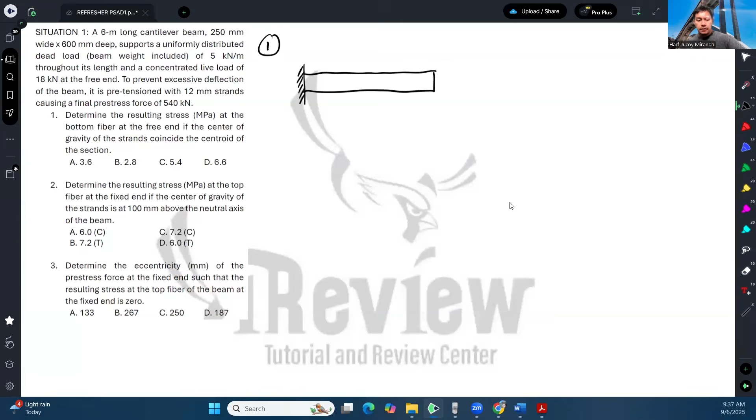So for number 1, we are given a cantilever beam that is 6 meters long, with a uniform load of 5 kilonewtons per meter, and a concentrated load at the free end of 18 kilonewtons. This is a pre-stressed concrete beam.

We are given a dead load and live load, but the analysis here is just elastic, so we will not apply load factors, unless the analysis is USD or ultimate strength design, which would require load factors. Currently in the board exam, all the pre-stressed concrete problems given by Ma'am Praxi are elastic analysis. We would know if strength design is being used if load combinations or reduction factors are mentioned. In our case, none of that was mentioned.

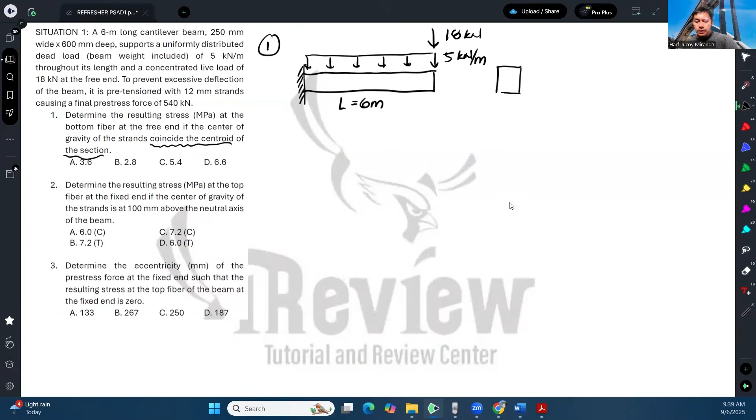So what is the resulting stress at the bottom fiber at the free end? It's important where - the stress at the bottom fiber, at the free end section. We know that these are the tendons, and they will produce a pre-stressing force of 540.

For problem number 1, since it's asking about the free end, the section we consider now is this - let's call it section A. If we look at section A, let me redraw it larger. This is section A, here is the tendon, 250 wide, this is 300, and this is 600.

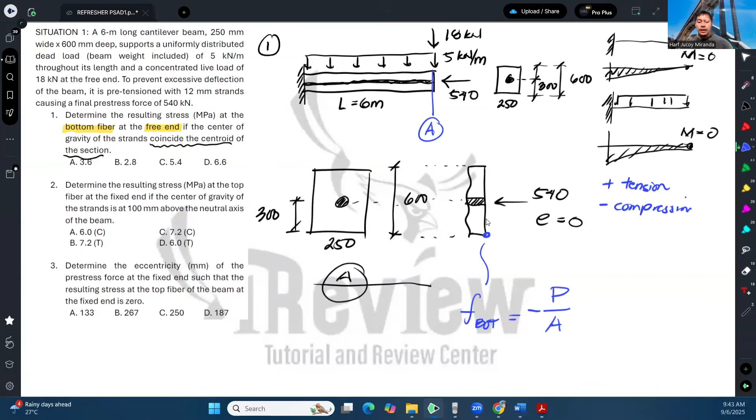Therefore, the stress at the bottom fiber will simply be P over A. Let's make tension positive and compression negative, so the pre-stressing force will produce a compressive stress. So we will have negative 540 kilonewtons over area, where area is 600 by 250. That gives us the stress at the bottom.

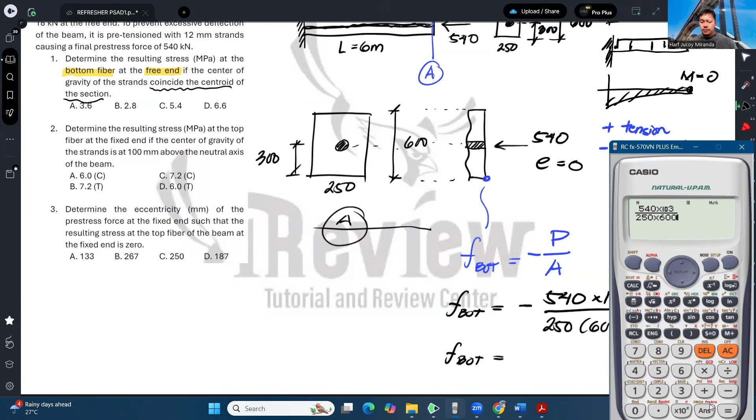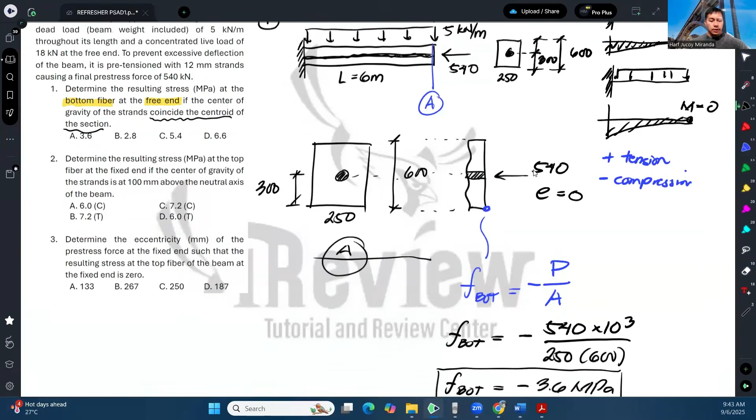So that is 3.6 megapascals, and the negative sign indicates that this is compression. Although wala naman sinabi dito, so 3.6 yung sagot natin. So that is for number 1.

For number 2, determine the resulting stress at the top fiber, at the fixed end. If the center of gravity of the strands is at 100 millimeters above the neutral axis of the beam, nilipat na natin to dito.

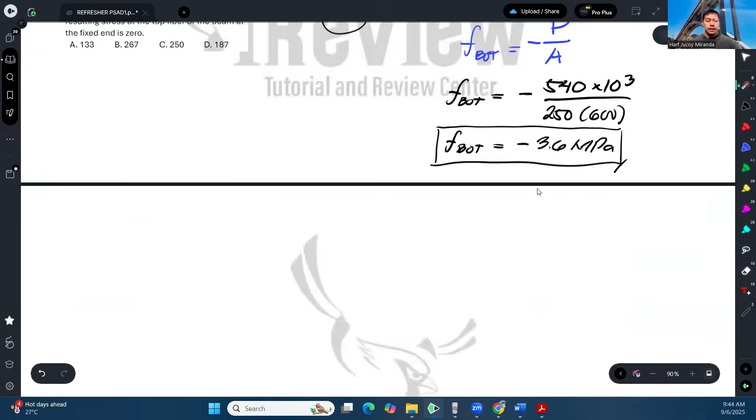So i-drawing ulit natin yon. So ito ulit yung beam natin. Siguro copyhin ko na lang to. Sige, copyhin natin.

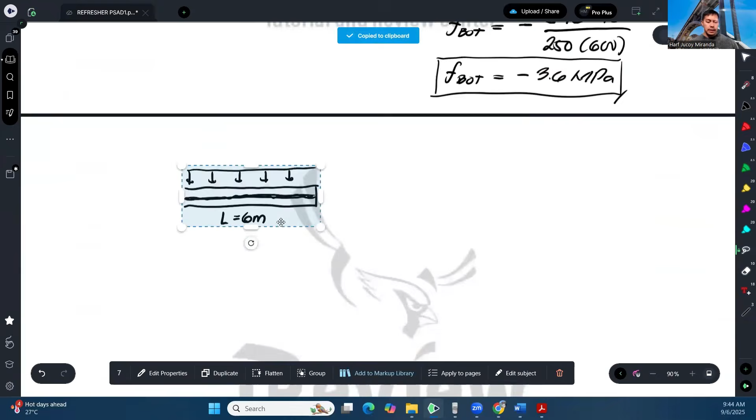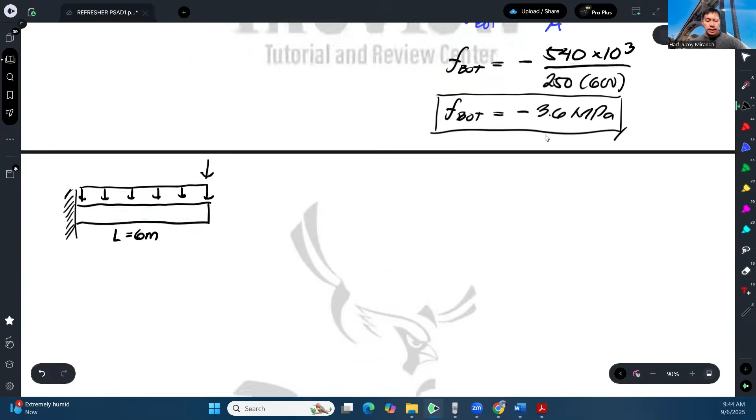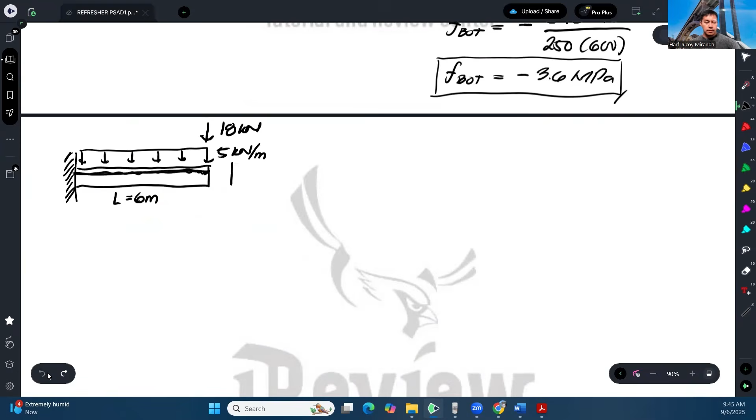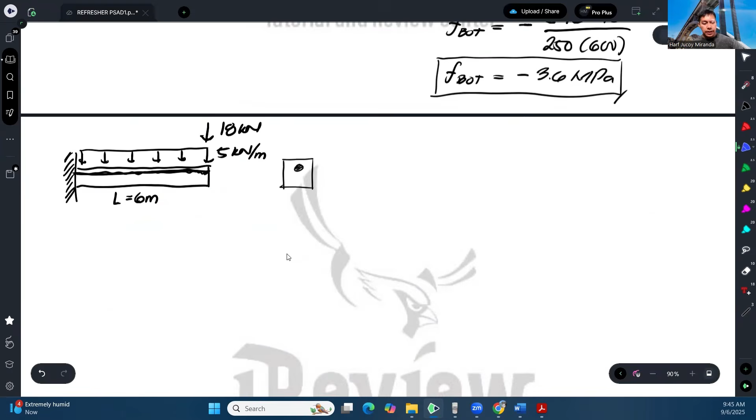Palakihin lang natin. Pero ang ina-analyze natin dito this time is itong section na to. Tawagin natin section B. So, drawing ulit natin section B. Ang section B, ganito ang itsura.

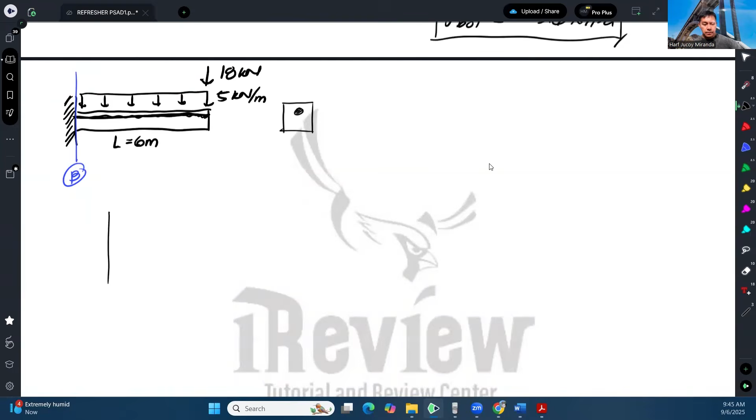Nasaan daw yan? 100 millimeters above the neutral axis. So, 100 ito, 300 ito. Tapos, this is 250. And then, overall depth, of course, 600. So ito yung section B.

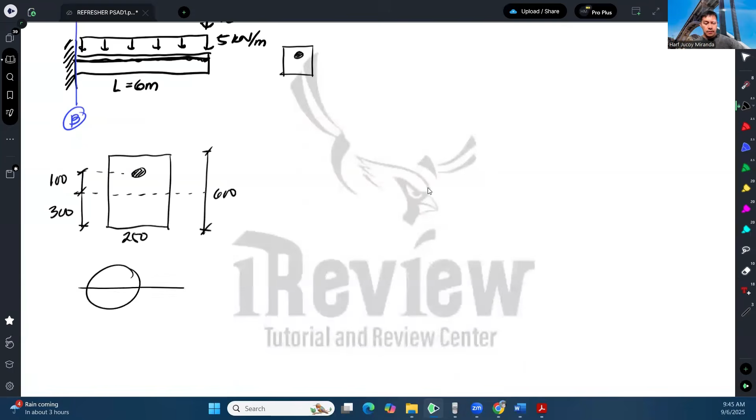Ngayon, pag dinignan natin sa side view yung free end, parang lumalabas, ganito yun. Ito yung support. Tapos meron tayo dito beam. Ayan, yun yung beam na. Tapos ito yung tendons natin.

Okay, so ngayon, nandito yung pre-stressing force na 540 kilonewton. So, it's actually above the neutral axis by 100 millimeters. Okay, so paano natin i-analyze yan?

Well, pwede natin i-convert into a force and a couple or a force and a moment. We have done this in the past na kapag meron tayong eccentrically loaded na force, mag-produce yan ng bending moment in this direction. Pero ito, pwede mong ilipat dito.

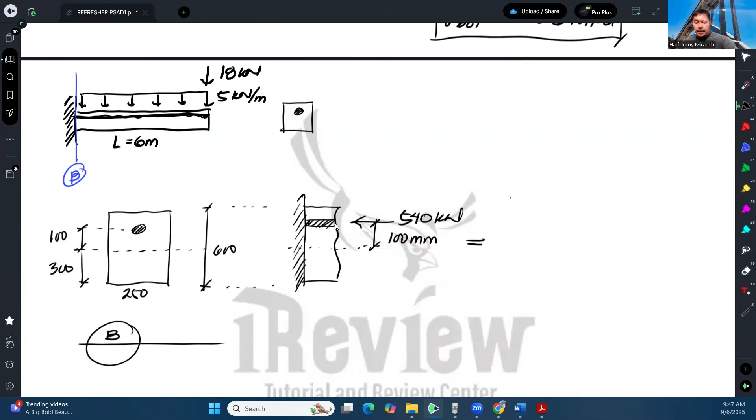Kaya mangyayari, pwede rin yan sabihin na equal lang yan sa nasa gitna yung 540, tapos meron kang bending moment. Now, moment due to pre-stressing force, and yung moment due to pre-stressing force is just P times eccentricity. In our case, that is 540 times 0.1, so that gives us 54 kilonewton meter.

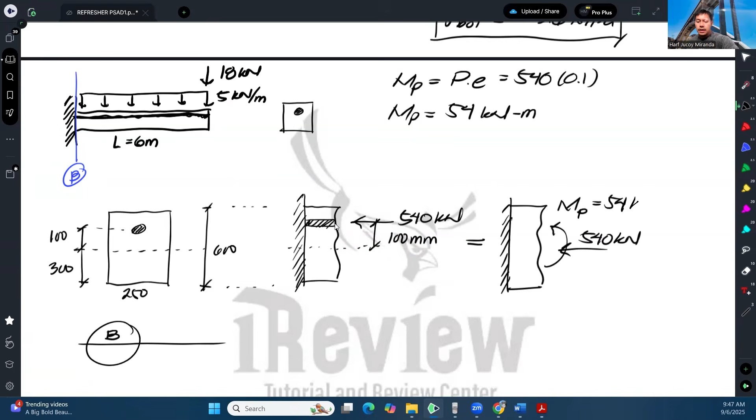Tapos ang tinatanong sa atin na stress ay saan daw? Sa top fiber. So dito tayo maghahanap ng stress, diyan. Ano tayo yung stress dyan?

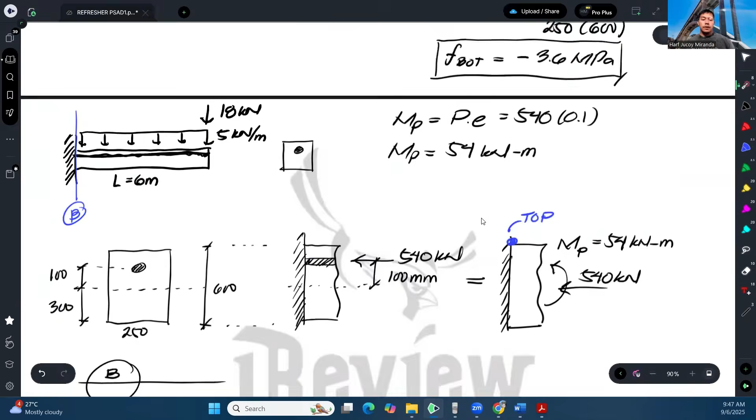So ang tanong ngayon, yan lang din ba yung force or mga forces and moment na nag-act dun sa section B? Now, if you go back, merong mga load. Di ba itong mga load na to will have a reaction here. So this will have, meron tayong reaction dito.

Yung reaction na yun, tawagin natin na M sa B. We can calculate that, no? Yung reaction sa B, so we just take summation of moment at B equal to 0. So we will have yung moment reaction sa B ay equal sa yung uniform load muna, 5 times 6 times moment arm 3.

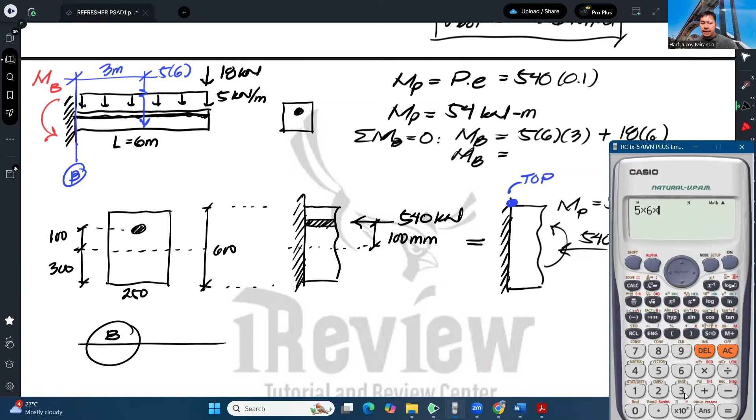Kasi di ba maging ganito to? So 3. Tapos ito, 5 times 6. Okay, and then plus yung 18 times 6. So that will be the moment at B. That is 5 times 6 times 3 plus 18 times 6, and that is 198 kilonewton meter. Okay, so yun yung moment reaction dun sa point na yun.

Alright, so ano itsura niya? Kung dito tayo sa likod, tama itong assumption natin na counterclockwise siya. Ibig sabihin, tama lang, di ba? Pag cantilever, familiar naman tayo dito na ano siya, negative bending siya, na pag ganito yung bending ng beam. Kaya ito, yung reaction ay pag ganyan. Ibig sabihin, yung top yung tension, yung bottom yung compression. Kaya pwede natin siya idagdag dito na pwede mo siya i-drawing sa kabilang side.

Ito yun, yung moment reaction sa MB. Ngayon, pero ang ano ko kasi, ang free body diagram ko kasi I am looking at this fiber na in this side. So, kung babalik tayo natin, yung side na yan, yung moment reaction natin, ito yun. Okay, na 198.

Okay, so ganyan ang itsura ngayon. So meron tayong positive moment galing sa eccentrically loaded pre-stressing force. Kaya natin nilagay yan sa taas para magkaroon ng gantong moment. So parang ang idea, yung gantong bending, kukontrahin niya, gagantuhin niya para makatulong dun sa deflection. Ganun yung idea ng pre-stress eh. So kaya dito meron tayong positive bending galing dun sa pre-stressing force.

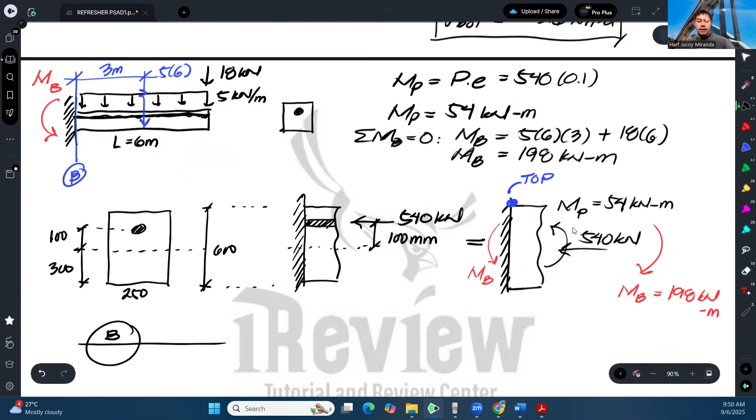So meron tayo nung equivalent axial force, and then galing sa mga loads, meron tayo nitong reaction na 198 kilonewton meter, yung moment reaction doon sa fixed end. Okay, so that means we can now define kung ano yung pre-stressing force, or rather stress, at the top.

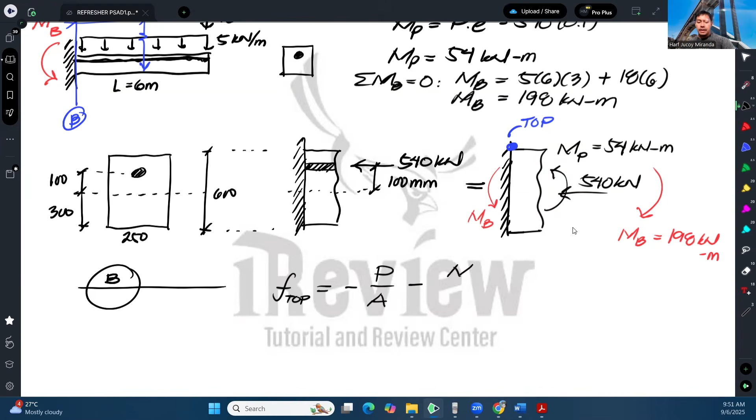So let me start dun sa 540. So compression yan, so negative P over A. Tapos yung moment due to pre-stress, ano rin siya sa top, compression, kaya negative din. So MP times C over I. And then yung MB naman, yung moment galing dun sa mga loads, will produce a negative bending, kaya dito sa ibabaw, tension siya. Kaya ibig sabihin, this should be plus: Moment at B times C over I.

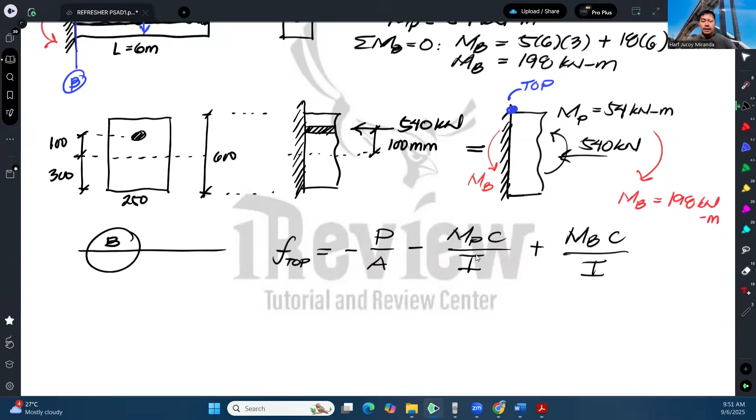So lagyan natin ng values: negative 540 times 10 to the cube over area, that is 250 by 600, minus yung moment due to pre-stress, 54, gawin nating Newton millimeter.

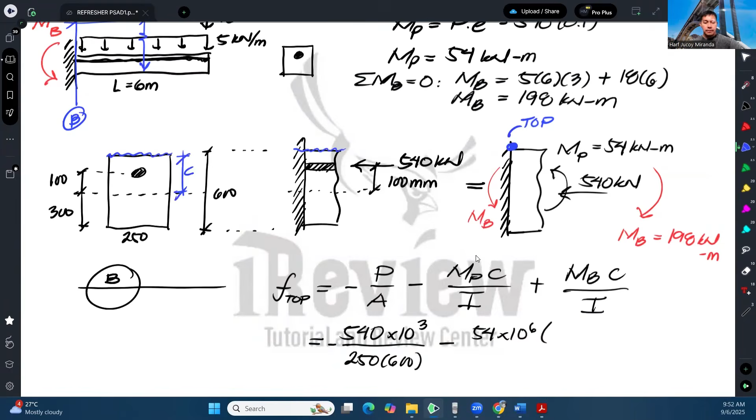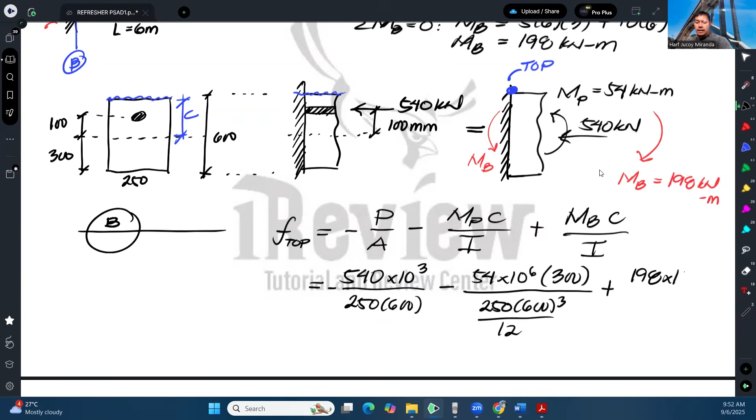Tapos yung C natin, basically ito yung fiber na pinag-uusapan. Yan yung C natin, which is 300, over I, 250 by 600 cube over 12. Okay, and then plus, yung moment naman at B, so 198 million, same lang yung C, over same lang din yung I.

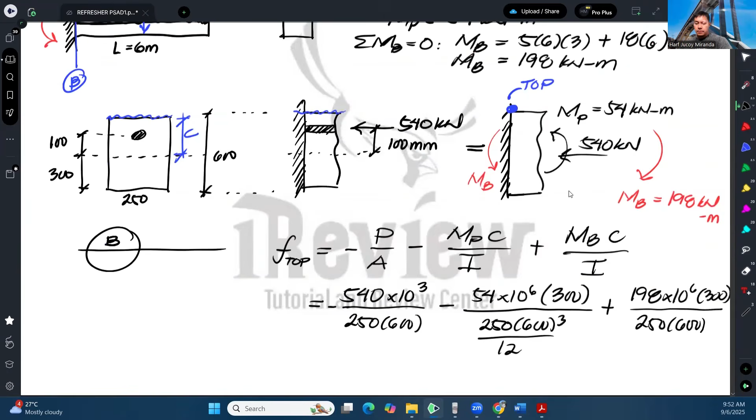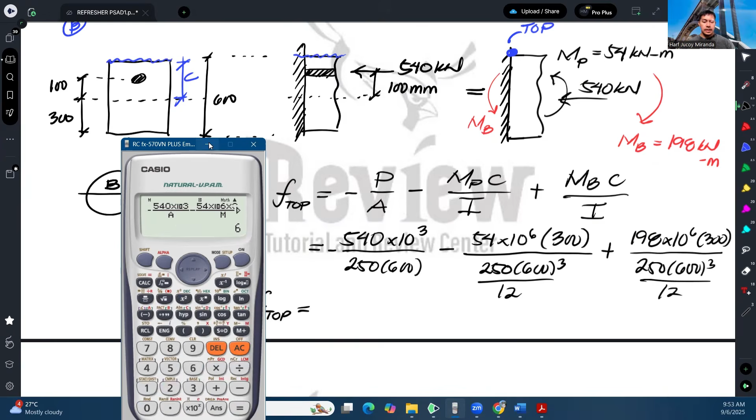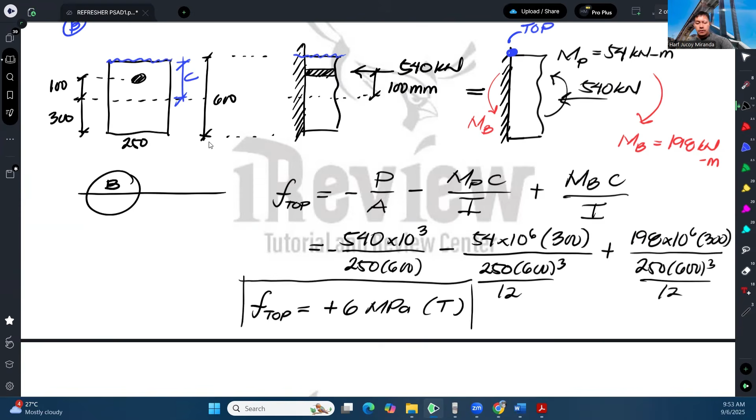Okay, and that will answer the question, ano yung stress sa top at the fixed end. So kumpitin natin. Okay, and that is positive 6 megapascal. So that means this is under tension. So our answer for number 2 is letter D.

Next, determine the eccentricity of the pre-stress force at the fixed end such that the resulting stress at the top fiber, sa fixed end, ay dapat 0 yung stress na tension. Ngayon kasi, so far, meron pa tayong tensile stress. Okay, ibig sabihin itong eccentricity na to, parang kulang, para ma-minimize yung stress doon sa top fiber. Bakit kailangan i-minimize yon? Di ba normally kapag concrete, mahina yan sa tension. So that's why nagpe-pre-stress tayo, para ma-prevent yung excessive na tensile stress na kagaya nito.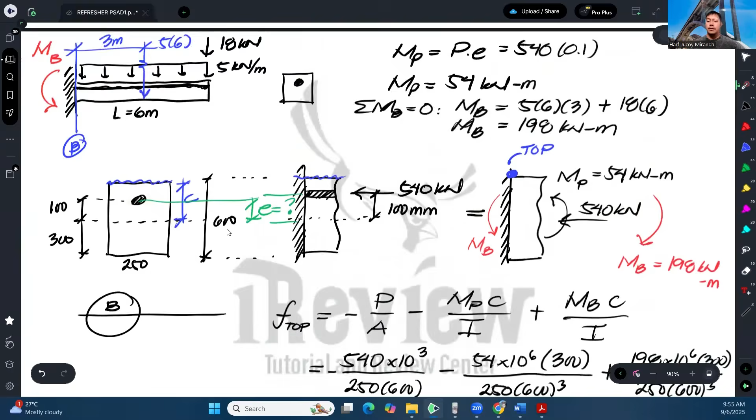Okay, so ito pa rin yung analysis natin. Yun nga lang guys, ang magbabago lang for number 3 ay gagawin natin tong unknown, magiging E lang to. So that means for number 3, we're looking for the eccentricity. Ibig sabihin yung moment from the pre-stress natin will be 540 times E, unknown. And then the rest, the same. Yun lang yung mag-iiba dito. Pero the rest, ito pa rin naman yung moment siya. Wala namang kinalaman yan kung nasaan itong pre-stressing force na to. Ito rin is still 540 over area. So we will just repeat this.

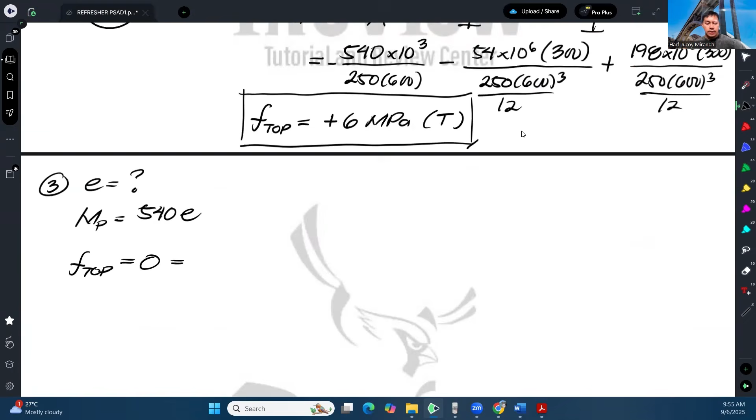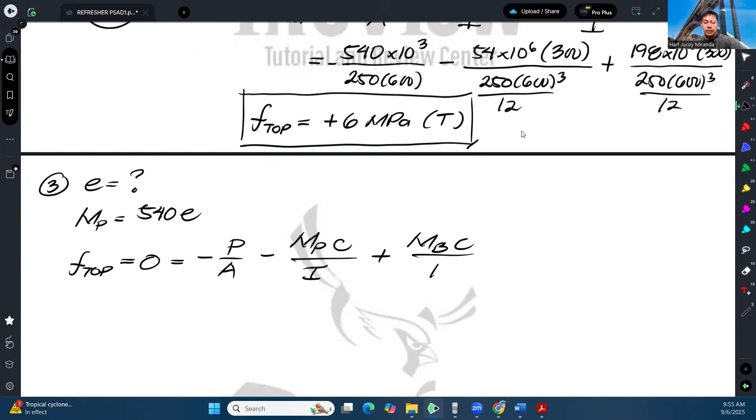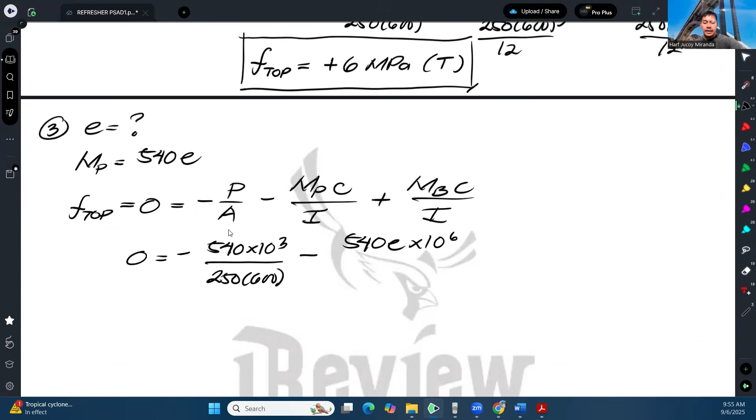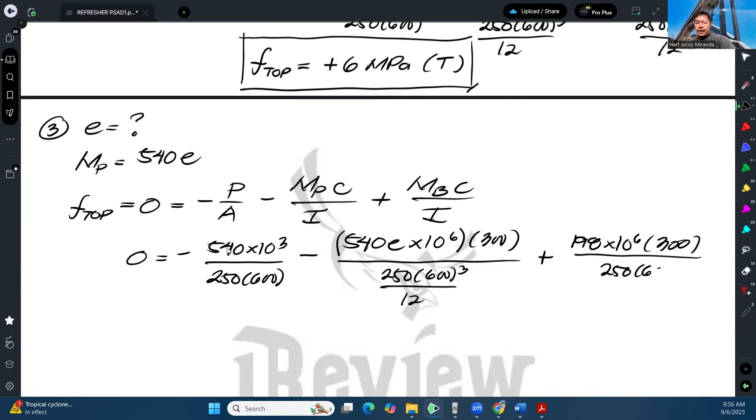So ang gagawin lang natin, yung stress sa top, isi-set natin na 0. Tapos negative P over A, negative moment ng pre-stress times C over I, plus yung moment from the loads times C over I. So we will have negative 540,000 over area, minus, ito magiging 540 times E, tapos times 1 million natin. Yung C natin is 300 over I, and then plus 198 million over I. Okay, and all we need to do is to solve for the eccentricity.

Bali, ito pa rin yan lahat. Gagawin lang natin tong 540 times X. Tapos equate natin sa 0. Kaya lang yung E natin dito, ina-assume ko na meter yan, kasi parang lumalabas. Kaya ako nag-multiply ng 1 million, kasi ito, kilonewton meter to. Di ba kilonewton na to? Tapos ito naka-meter, kaya pag nag-shift solve tayo, isipin nyo, meter ito. Ang lalabas yan, naka-meter.

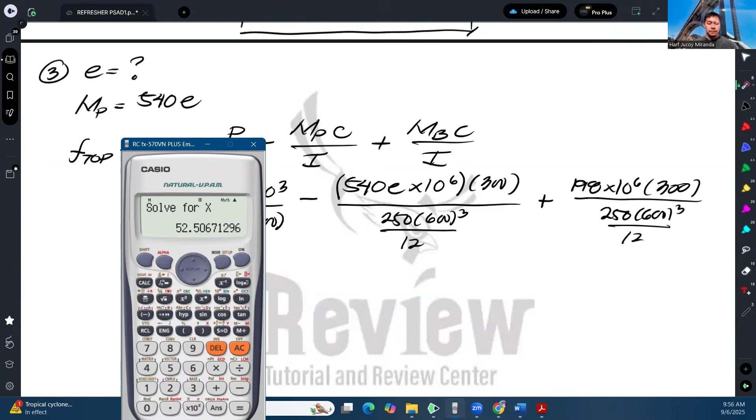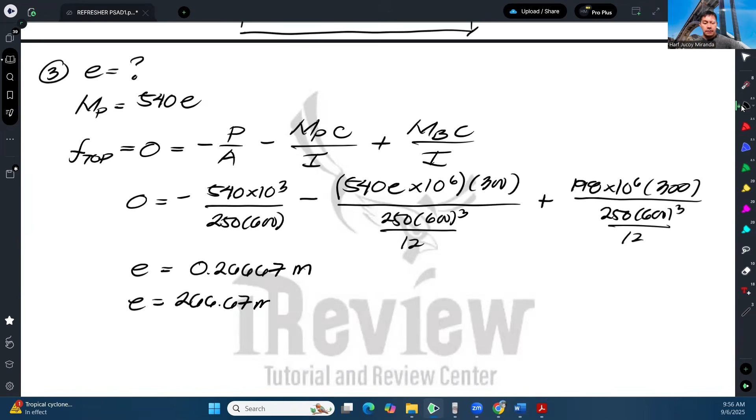Okay, and that's 0.26667 meter, or that is 266.67 millimeters. So that is the required eccentricity para 0 yung stress sa top. So letter... okay, and that's how we solve this problem.